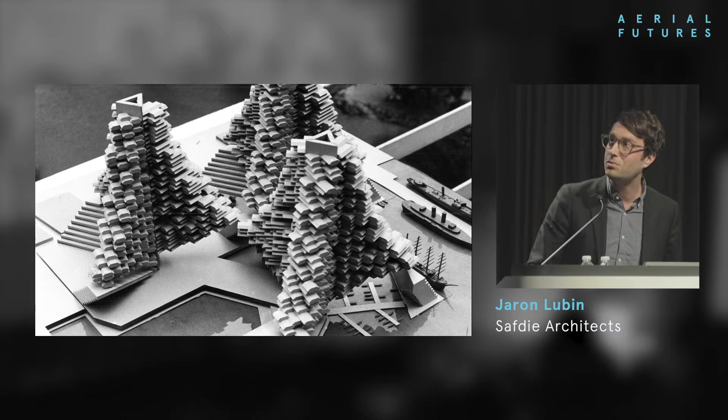That was the built Habitat in Montreal, but there were other unbuilt Habitats that are even more exceptional and exciting—one proposed in New York, and another also proposed for New York, my two favorites. And this was Moshe 50 years ago: 'The Shape of Things to Come' on the cover of Newsweek. It was a utopian, forward-looking time with a lot of emphasis on what a city could be.

But now—this is a picture of Hong Kong pretty recently, showing congestion. Do we have the tools? The question we often ask as we write and think about these places is, do we have the tools as designers to actually make a great impact on our cities?

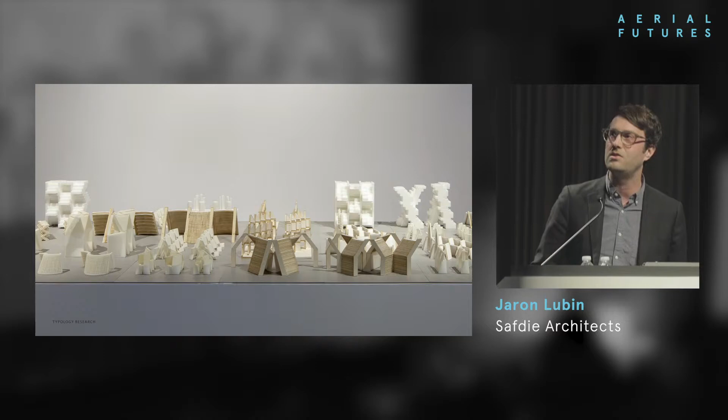So we're constantly speculating in our practice on how you could take traditional models of vertical extrusions of towers and rethink them—both residential typologies and mixed-use typologies, and airports too. I'll get to that a little later.

This comes to a series of research propositions with tall buildings broken down into stepped structures with large urban windows and more three-dimensional spatial networks, where we try to give everyone a terrace and an opportunity to live both indoors and outdoors.

We're also thinking a lot about multiplying the ground plane, as other architects are, and trying to develop new metrics to quantify or qualify the merits of tall buildings aside from their height. Even organizing the projects in our office by height just doesn't seem sensible anymore. So how do you talk about this different model of understanding tall structures in the city?

In Singapore, I've personally been working for 15 years, and we've done a lot of work there. I think one of the things we've learned is that when you have cooperation with an intelligent authority—the government authority, the URA—you can do great things.

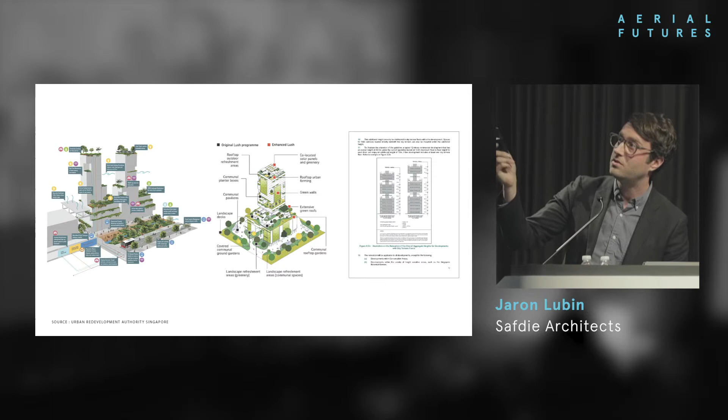They offer simple incentives. On the right-hand side is an extract from a guidebook they hand out to anyone doing work in Singapore, saying if you provide sky terraces in your building, they'll allow you to go taller and give you a GFA incentive to build more. So you're kind of insane as a developer not to do this. And in the middle, there's a recent piece from the Straits Times—they're very good at PR—offering new incentives about cladding all their buildings with greenery.

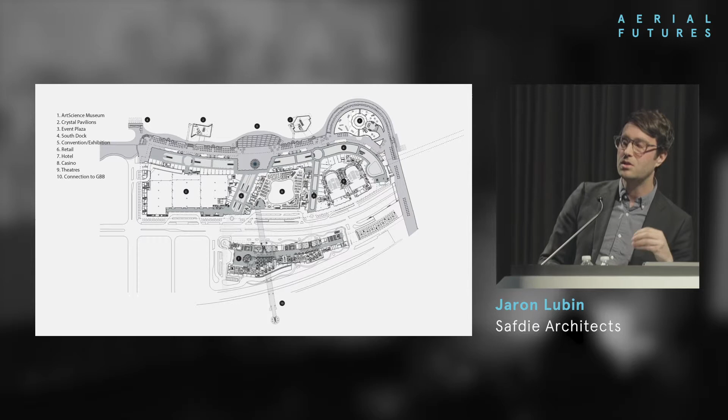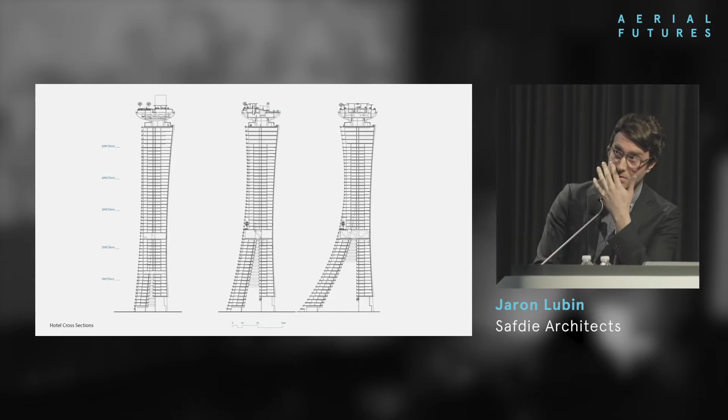Very quickly, I'll show three buildings. Marina Bay Sands started as a dream and transformed the entirety of the Marina Bay district. From the perspective of a very large program, 10 million square feet, we had to break it down, not at the scale of architecture but from an urban design perspective, into more manageable bits. I thought about the notion of duplicating the ground plane.

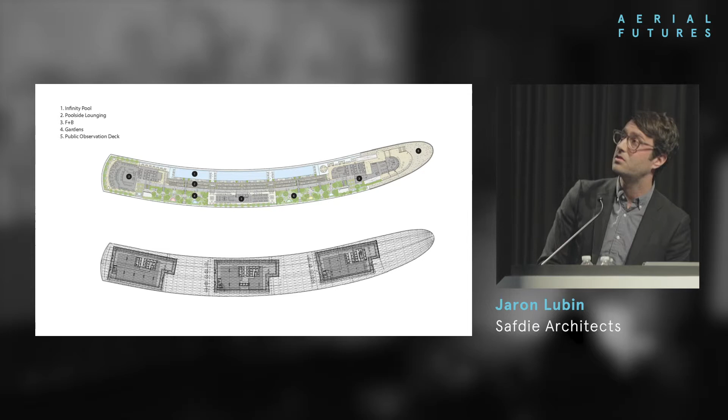On the right-hand side is the atrium, the ground floor of the hotel, matched with this Skypark we created together with Peter Walker's office. It's primarily for hotel guests. It's a phenomenal resort experience overlooking the city, with gardens floating above the hotel. You get this amazing 360-degree panorama experience up there from the signature swimming pool and the gardens. So yeah, drones could definitely land there.

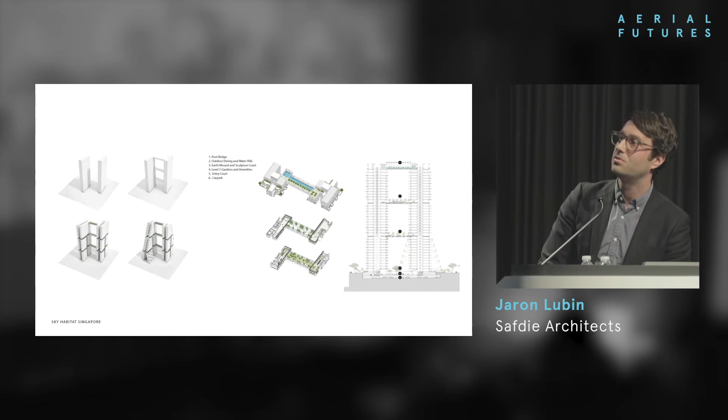Another project recently completed is called Sky Habitat. It's a purely residential project, but again, lots of stepping. There are three common sky bridges that, because the units aren't huge, we've provided for the people who live there and their common spaces. Because of the GFA incentive by the government, we built them over and above the maximum GFA for the project, so they were part of that incentive program I mentioned earlier.

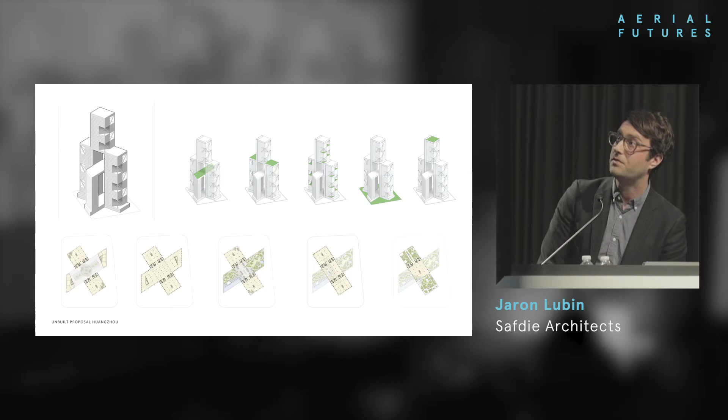This is a quick slide of a mixed-use project we proposed in Hangzhou recently, again multiplying the ground plane, mostly for office spaces, suggesting a series of common public spaces that could be shared between office workers and people going up to different restaurants at different levels.

The final couple slides I'll show you is this project that opened last week in Singapore. It's called the Jewel, at the center of all the terminals at Changi Airport. The idea here is that a lot of people actually go to Changi Airport. The public go there, hang out at the airport in the departures hall, do their homework, walk around, take their wedding photos. So the airport said, we're going to take this parking lot in front of Terminal 1 and run a competition to give a space back to all these people.

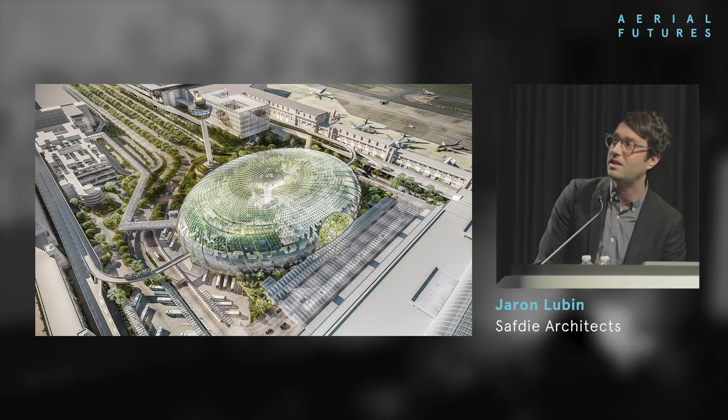The brief had a retail component, about 1 million square feet of retail, and they wanted some kind of attraction, offering different ideas, whether it should be a dinosaur theme park or some kind of themed thing. We came with the idea that the attraction should be a big public space, a huge public garden at the center of the airport. It serves the Singaporeans who live in the neighborhood, 80%, and it's also the gateway now as you arrive from Terminal 1.